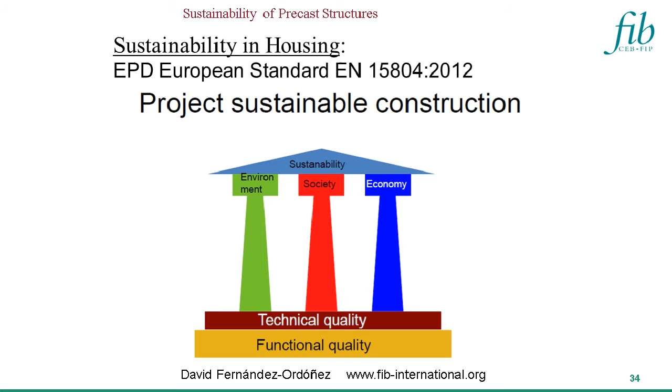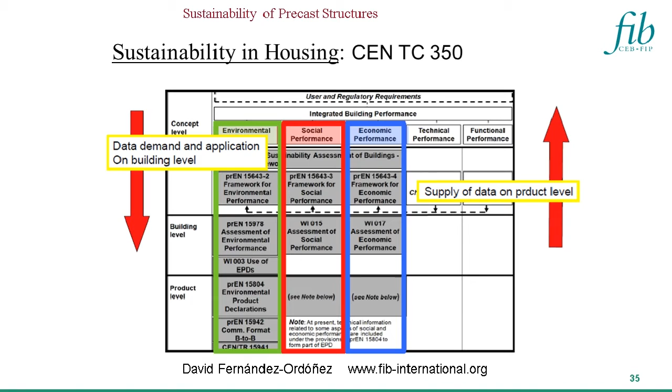This was already said in the Model Code 2010, and now in the development of the FIB Model Code 2020, this is more evident, and we will have some general provisions to take into account these three pillars. If we go a little more into one of the regulations, that is the Eurocodes of CEN, we see that we have several developments of regulations in the three pillars, environmental, social, and economic, and regulations that go from general to particular. And this is quite important. We see the three colors of the three pillars here, and this is maybe interesting to understand.

And we have to find that these regulations are consistent and that they are related to each other. Up to now, we have a lot more development on the regulations in environmental performance, and the whole world is really looking at the environmental performance. But we have to understand that it's not the only performance that we have to take a look at.

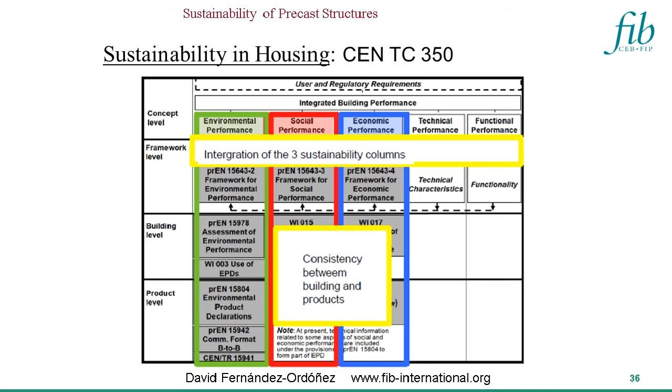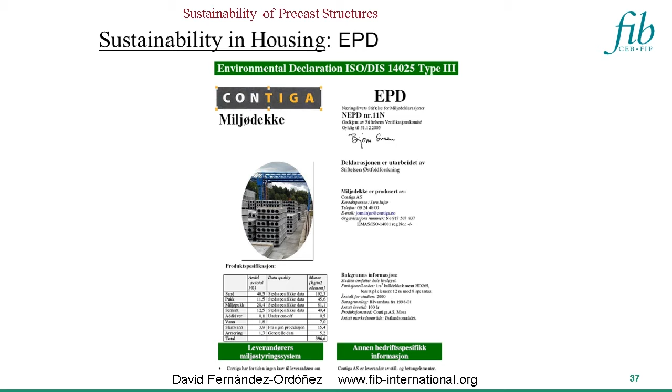But only with the EPDs we do not have the full information, because the EPDs give you mostly environmental aspects, and mostly from the beginning of the life of the product to the gate, so from the cradle to the gate. That means the loads or environmental aspects until they leave the factory. But as you know, we have many other aspects that we have to consider in sustainability. One is that we have to consider the three pillars. In this sense, we are considering one of them, and only partially.

Okay, so what we did in the document also was to take a look at what were the tools that have been used for buildings, for example, to evaluate sustainability. And we found several tools, some of them very successful, like LEED or BREEAM. And these tools, we found that they had a background behind them that was not really evident. There was no background documents or ways to see how this was evaluated. And these evaluations were done by points, and these points were given by the organizers of these tools, but there was no link between the regulations and the tools.

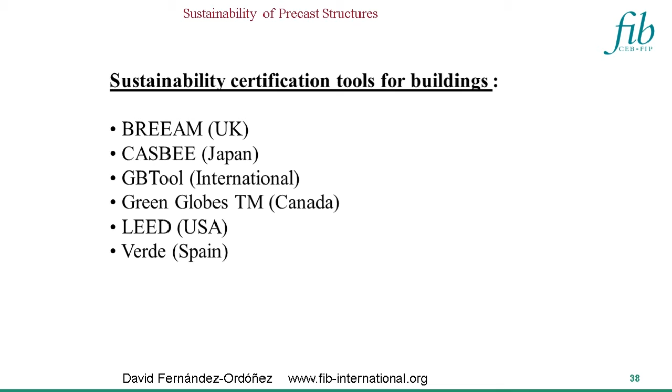So what we saw is that what is sure is that there is a need in the world to evaluate sustainability, and there is a need to certify and to show the society that the buildings are really sustainable or efficient from the energy point of view and many other points of view. So this is a must that we must tackle. The engineers, civil engineers, or architects, or people around the construction industry, we need to tackle this issue, because otherwise, if we don't do that, other people will do that. And we need to take a look at how these things can be done, and give a proper background to how to do these things.

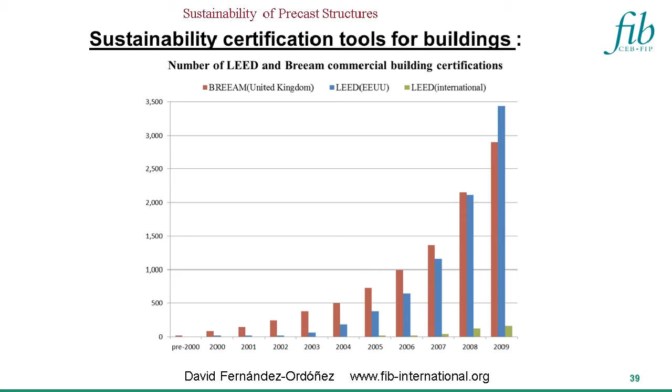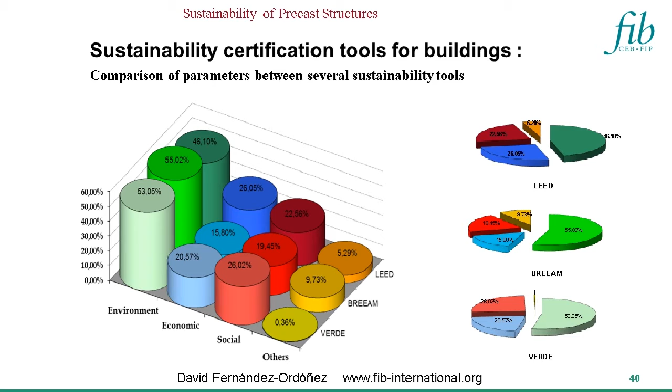So now, at least we have an overview of what these tools are doing, these tools that follow their own rules. And so we wanted to try to take a step forward and try to make an open tool, an open idea of how to evaluate sustainability in buildings or in construction, in particular in precast elements. So the first thing is that we had to take into account life cycle assessment, and we had to take the full life of the structure, not only like the EPDs from the cradle to the gate, but all the way through the structure.

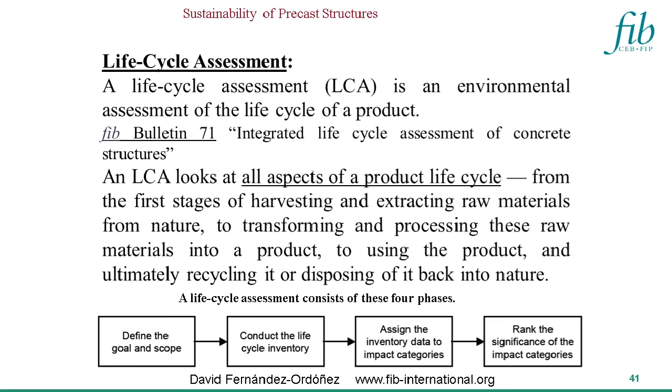And we based our information on bulletin 71 that deals with integrated life cycle assessment. And this is a very interesting document that allows you to take into account how to deal with these aspects, and all the different phases that you have to take into account. Before, we were talking about dealing with these different pillars. Now we deal with the whole life of the structure. And this is what we need to do. We need to do what we call today the circular economy, or circular way of designing: where the material comes from and where it goes, and that it's going to be reused.

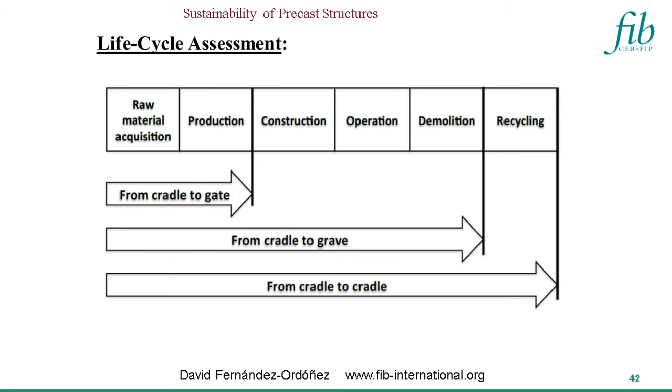Today, one of the aspects that goes around precast elements is everything that is about circularity and reuse. It's no longer only demolition and recycling, but also design to be reused. And this is a very important aspect that in some countries is really something that we need to take into account. So we then took a look at what precast structures can give to sustainability, and we knew some aspects. We did a SWOT analysis of strengths and weaknesses and things like that.

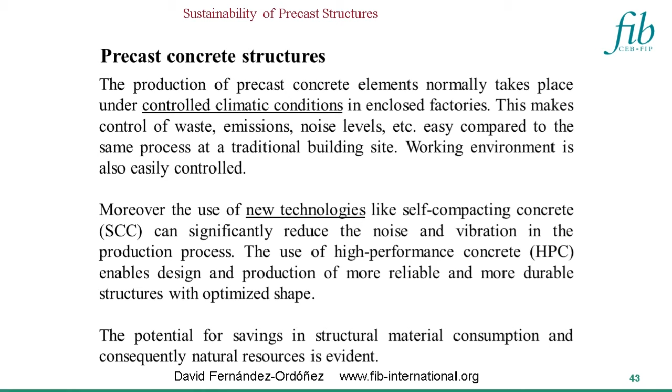And of course, there was a feeling in the precast designers and industry that some things around precast buildings are important, like the controlled conditions, the application of new technologies first in prefabrication, the possibility to have flexible structures, long span structures, high strength concretes, and this was in a qualitative way something that we found very interesting, but we needed to evaluate them. And how to evaluate that? We know that we can recycle because we are in a factory, we have the material to ourselves, we can integrate all the thermal mass into the building. We know a lot of things, but we didn't know how to deal with that.

And I'm going to show you some examples of what researchers and some studies were doing, and we know partially that some things could be done well in sustainability of precast structures.

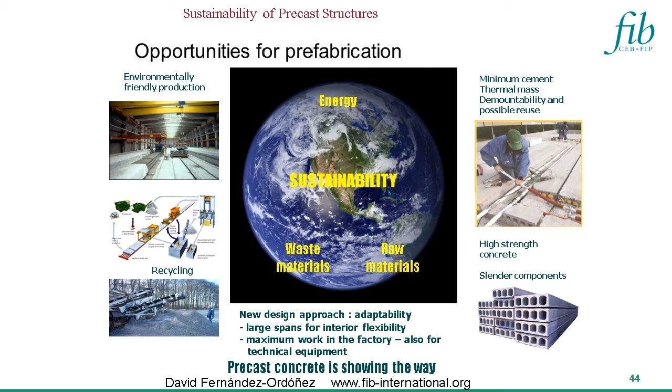Today, we hear that industrialization is the key of many sustainable solutions, but we didn't know exactly how to deal with that, and I will show you how we can deal with that later. So, this format has been moved a little bit with the system, but

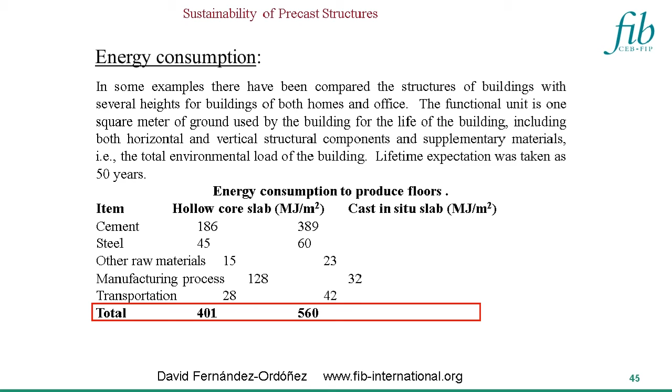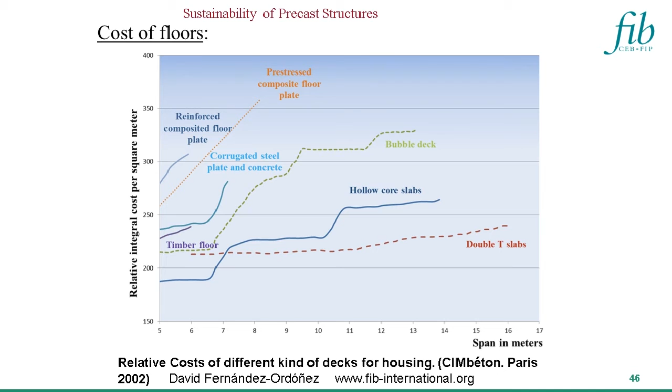And then we have another example of another study. Here we were dealing with energy, here we're dealing with cost, in France this time, and depending on the span and the different kind of floors for buildings, where are the costs and where different costs can be good, and this is one of the aspects that we can deal with in sustainability. So you see from corrugated steel plate floors to in situ bubble deck, timber, or hollow core slabs or double T slabs, which are precast floors that are very efficient for long spans. Okay, so this is another example.

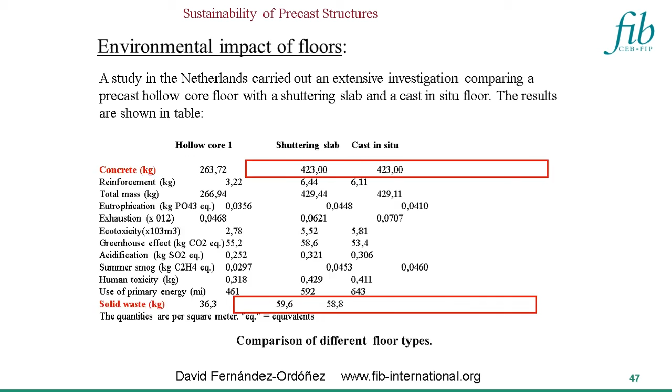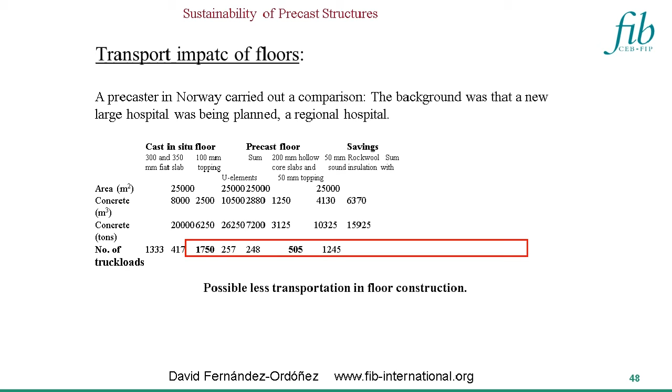And then another one, which is quite interesting, is evaluation of the transport of different kinds of floors. And even if with precast floors we have bigger transports, we have like 1/3 less transports than we do in a normal construction, because we have larger transportations, but with the normal ones transportations are smaller, but they have a lot more transport, which means a lot more CO2 in transportation, and also a lot more problems for the people that are living around the work areas. So these are partial studies about that.

Okay, so we decided to take a look at how we can put together these things that are so different: energy, CO2, the problems to the society, emissions, costs. How can we do that? So we needed a tool that would allow us to mix together many things that are different and give the relative importance that we want to these things. So we decided to use a multi-criteria method that is called MIVES, and this method means that you can deal with all the aspects in one go. I will show you very shortly how.

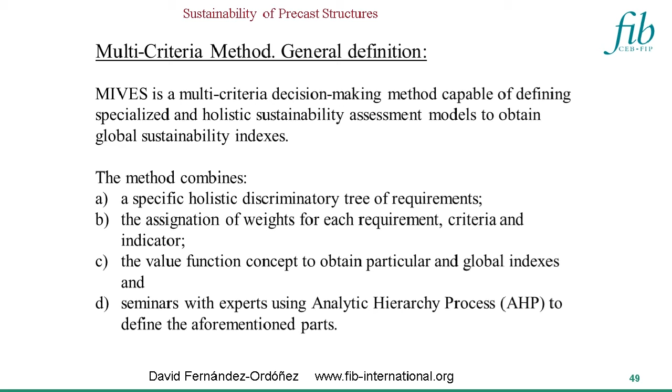And then you have a global view of what you want to deal with, and you can assign relative weights depending on the needs of the building in that sense. I mean, you don't have to have a general theory for sustainability. You have to analyze in each country and in each special moment what are the consistent weights that you need to give to those, to evaluate sustainability and to try to decide that your solution is good or the best possible.

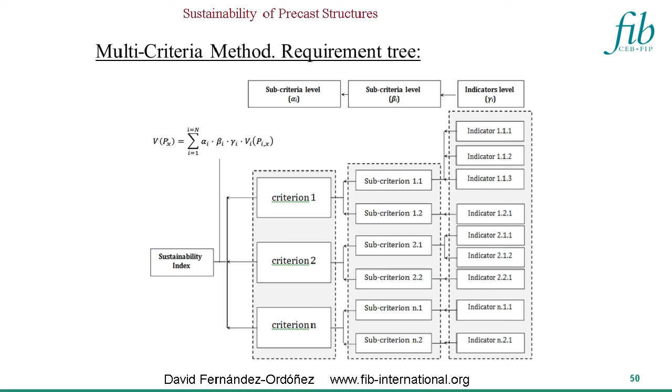So this is the concept of how you work with this. You're trying to reach a sustainability index, a numerical value, and this goes through 3 levels. What we call the first is the criterion, then sub-criterion, and indicators. And how we do that: after each evaluation of these indicators, of course, we give those indicators a value that goes from 0 to 1.

So you relate, for example, costs to a value from 0 to 1, and then you can assign different functions that go from linear, the most simple, increasing or decreasing, or different curves, concave or convex functions, that can be more consistent to what you want to evaluate.

So you have your indicator, for example, CO2 emissions, and then you are going to make these CO2 emissions into a relative value from 0 to 1. And then you will mix that with cost, with safety, or with the aspect that you want to deal with.

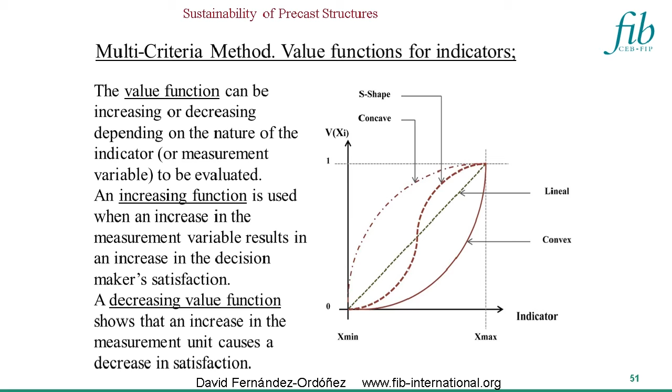So what we did also in this group is to try to apply this and try to give a proposal of how to use this for precast structures. And we have a discussion among the group. We also have seminars, and we ask experts on what would be the indicators that we would use, and what would be the relative weights that we would use for that.

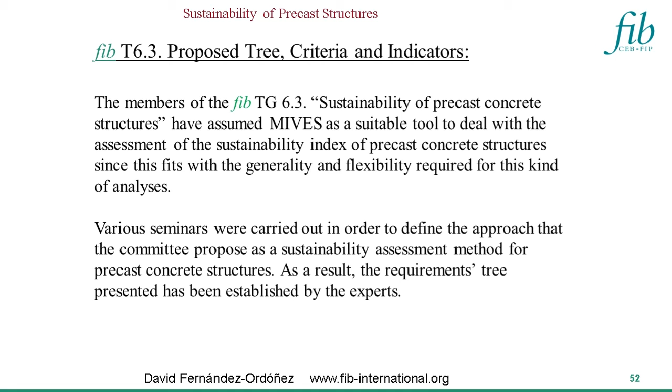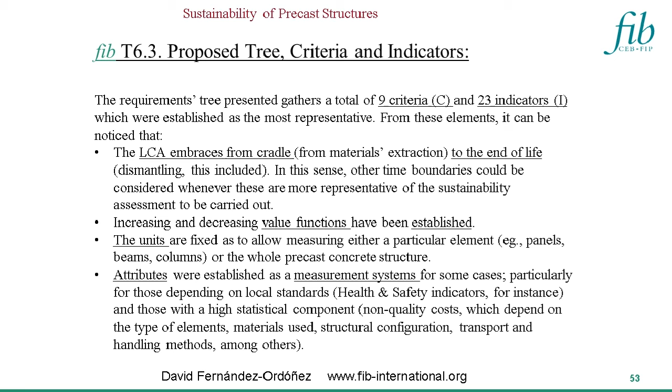So we, of course, define 9 criteria, 23 indicators. We define from the cradle to the end of the life for circular economy, and we establish the functions. We establish what we should measure, and the abstract of all that is in this table.

It's very hard to go in the short time through all this table, but you can see that you have economic, environmental, and social aspects with a weight, and then within economic you divide it into costs, quality, dismantling, or service life. All these are costs, okay? And then the indicators go a little bit to the right, and then environmental, we have the consumption of materials, emissions, energy, okay? Or social, we have third-party disturbances and pollution, or health and safety.

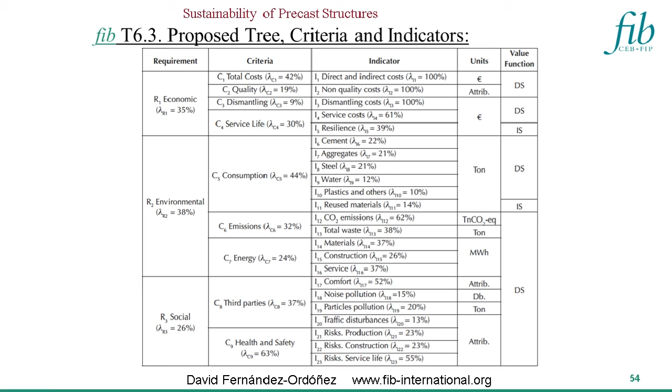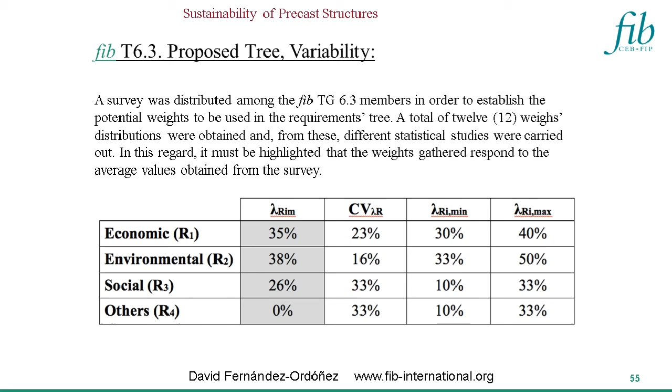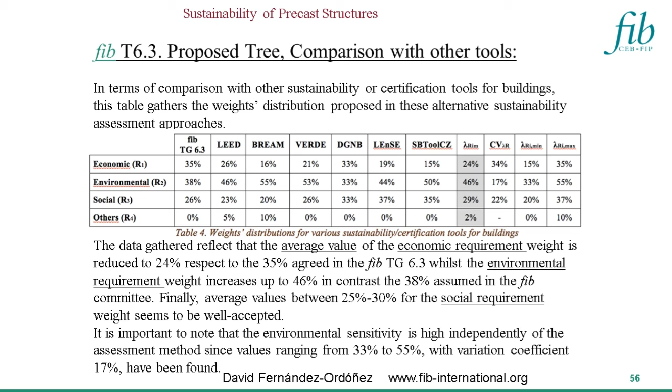You can see there that some of these systems have a big weight on environmental aspects, a very low weight on economic, most of them, and social aspects are also very low. Okay, so we decided to make this available, so you have this information also in the document. And we ended up having this proposal and how to deal with that. And as we don't have a lot of time, I will just show 2 slides of an example.

One of the examples that we have in the document is what is the most sustainable solution for a concrete column for buildings, a very specific aspect of how to deal with columns. So this is the example in which the economic part is 50%, environmental 33%, and social 17%. And then you decide on different criteria, construction cost, efficiency, and so on, and then you go down to the indicators, and you have to value the indicators in each one of those aspects.

Building cost, non-acceptance cost, that means quality, maintenance, habitability, which is very important in columns, or CO2 emission, consumption, and all these aspects. Studying all these indicators in detail, you go down to a single value that is below 1. And then you can compare different kinds of columns, circular in some cases, with different compressive strength, with different sizes, and square columns.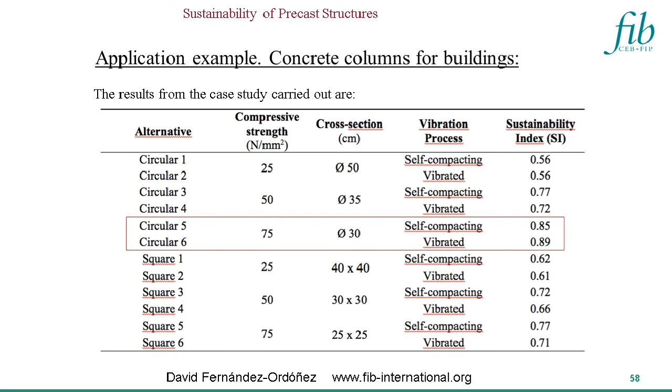Okay, and this is the explanation of how one type of column or other type of column can be better or not, depending on the criteria that you have put in the beginning of the solution. So this ends my presentation.